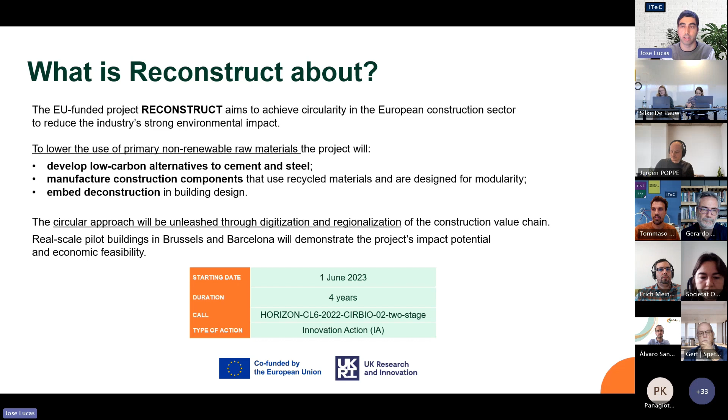One of the main objectives of the project is to try to give solutions to some barriers. There's a list here that I'm sure a lot of you will agree on, but I'm sure there's also missing barriers here. Some of them may be the lack of awareness of how circularity or how these materials with high content of recycled works, high initial cost, fragmented supply chains, lack of standardization for reused materials, for example, or technological challenges to share information between different peers of the stakeholder value chain.

The strategies used in the project are material innovation, design for deconstruction, and digitalization of the different parts of the project. In material innovation, we are replacing ordinary Portland cement with a low carbon solution that my colleagues will explain more about in the focus groups.

In the design for deconstruction, we are integrating the deconstruction processes into the design of the architectural demos itself. We are developing different kits to be dismantleable, ensuring that dismantleability and adaptability are met in these demo cases, and that the demolition sends all the waste to recycling paths or reuses the components.

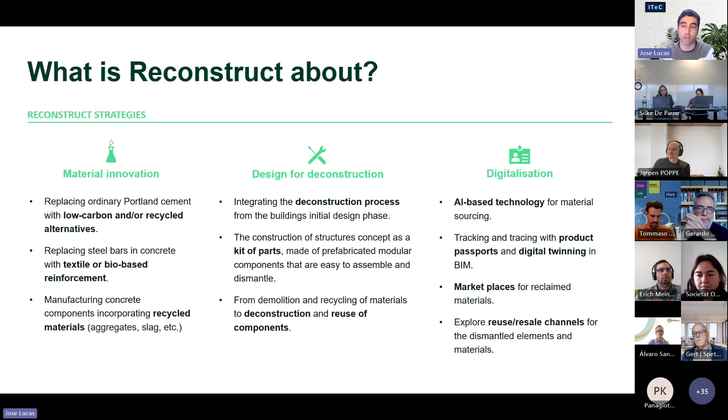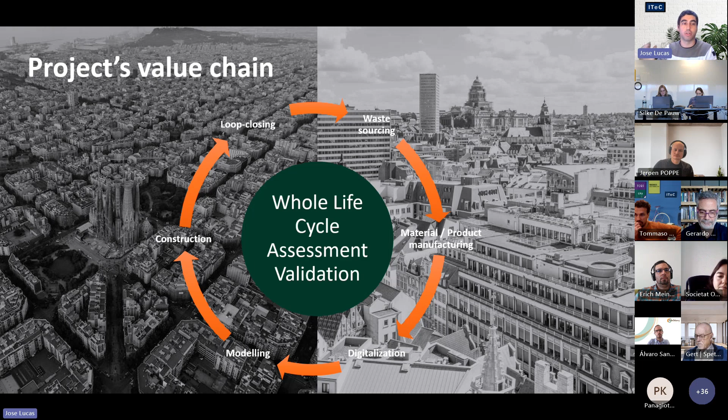As you could see, the project acts in the whole value chain, from the waste sourcing till the loop closing, going through material manufacturing, digitalization, and construction. All of it will be assessed with the different pillars of sustainability, circularity, symbiosis, but also LCA, LCC, and social assessment that will ensure the project is tracked and assessed, so any of these solutions could have a major impact in others that we don't know about.

How are you going to do it? We are 16 partners in the project. Some of them are construction companies, some are manufacturers, but there's also academia, public administration, and technological and software suppliers. So the whole value chain is represented in this consortium.

Hopefully with this connection with you, we will have more agents and more actors in this value chain.

As I said, there's two real scale demos, one in Barcelona and one in Brussels, that I will go through very slightly in the next slides, which will demonstrate these methodologies and technologies in those two different regional situations. Also, for what we are today here, there are two different regional clusters, one in Brussels and one in Barcelona, that will create and co-create different activities and co-validate different results. So all the results expected from the project are validated by the consortium and the different actors of the value chain.

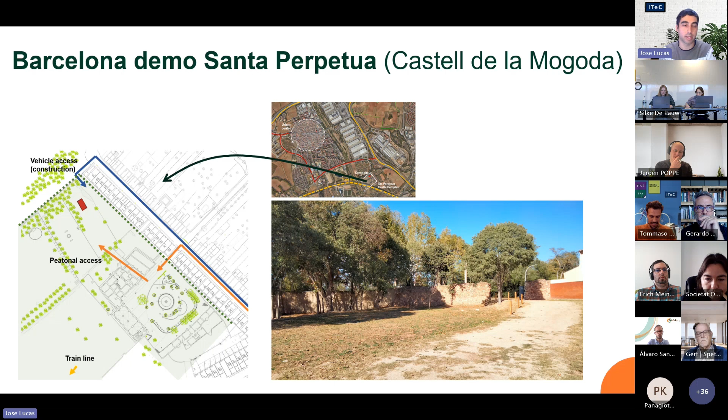Talking about the demos, very slightly: there's a demo case in Barcelona that will be on the land of Incasol, a public organization there. This demo case will be simulating a residential building, but a very small one, 40 square meters, with all the principles I was talking about: dismantling with different materials, with alternatives to concrete and cement, that will be dismantled or repurposed for future demos.

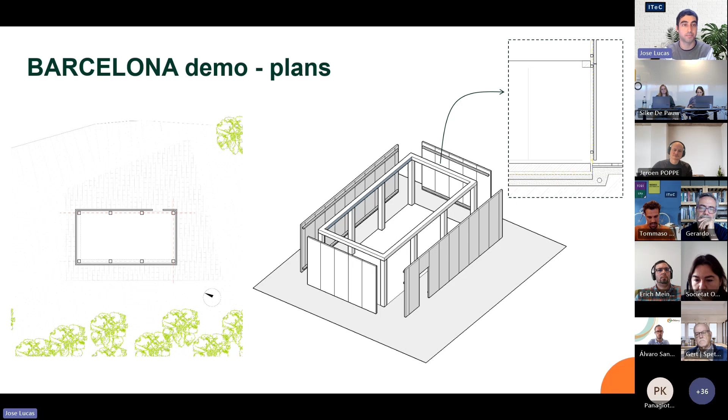And then we have the Brussels demo in Green Energy Park, where the simulation will be an office. In this case, this building will be kept there and used for that purpose. The Barcelona demo site will be dismantled to ensure that the circularity of those products is as expected in the design phase.

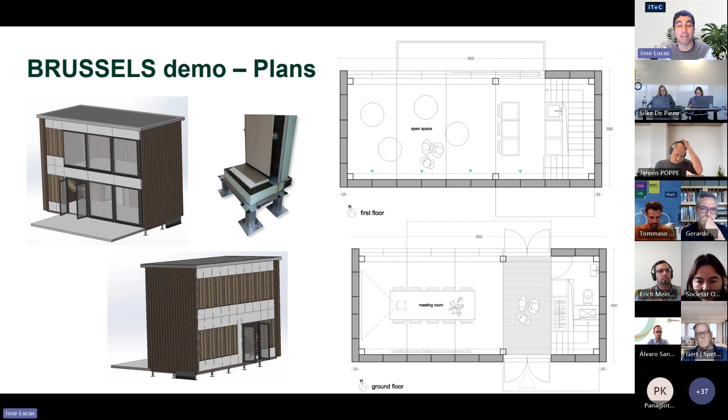Just to finalize, the expected impacts of the project on the construction sector are: reduction of CO2, embodied CO2 of the buildings, reduction of construction waste, lowering as much as we can the non-renewable content, increasing the recycled content—these two objectives go hand in hand—and closing the loop with construction demolition waste, sending as much as possible to recycling and avoiding landfill.

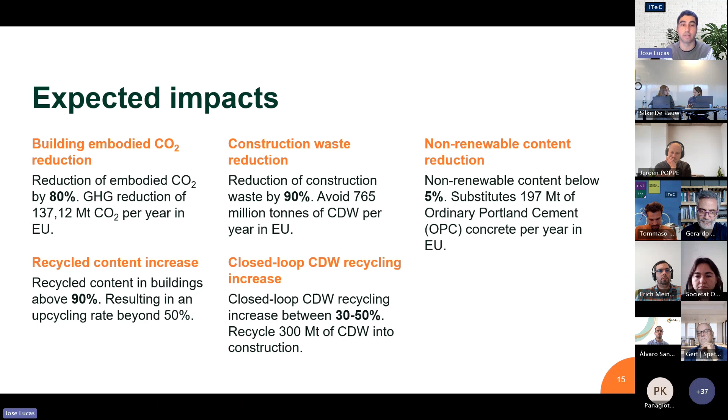On top of that, we will provide a platform where everybody in the hub will be able to talk to each other, and which will also be the platform where we transfer that knowledge to you. We will send you all the information, and we will post some training modules for you to use and have.

That would be a nutshell of the project. I will leave the floor to Eric and Alvaro to talk about the different focus groups, the hub. Thank you.

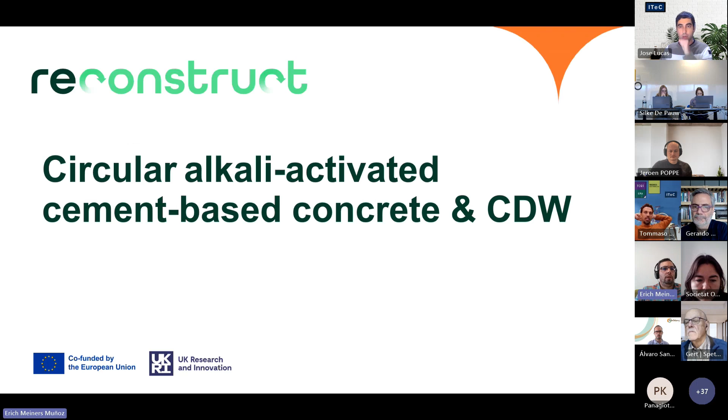We will start with the circular alkali activated concrete. The main objectives of this section of the project consist of reducing the carbon footprint of cement production by developing an alternative to ordinary Portland cement, where alkali activated cement is produced using industry byproducts and wastes. These new materials will be used to build modular prefab and on-site structures, where the amount of concrete needed for production is reduced, lowering the carbon footprint by the end of the life cycle.

Also, as part of this work, a tool will be developed to identify materials for construction and demolition waste using hyperspectral imaging techniques, which my colleague Alvaro will explain in more detail later. Using this information, an artificial intelligence will be trained to quantify the viable materials, facilitating their reuse and recycling once the building reaches the end of its life cycle.

The developments of the low carbon footprint cement and its different applications: the Vrije Universiteit Brussel, the Polytechnic University de la Marche in Italy, and the Technologic Center of Construction, ITeC, in Spain are working on the development of alkali activated cement, which consists of using waste products from industry as precursor materials like fly ash, slag, among others, then adding a combination of special activators to produce this alternative to ordinary Portland cement. This paste can then be mixed with sand and gravel to produce a concrete.

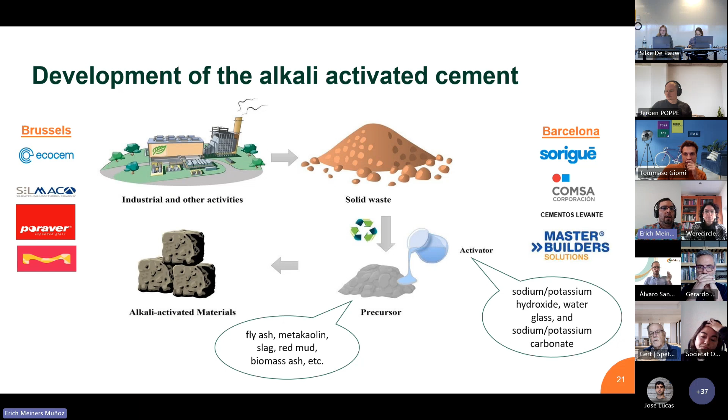This material is going to be used in different applications in the frame of the project. Two regional pilots are being developed, as mentioned before by Jose Carlos, one in Spain and the other in Belgium. The Spanish demo will consist of a one-story building designed for residential use.

The alkali activated cement paste is going to be used to build on-site and off-site production of structural and non-structural elements during construction. The facade elements will be modular and detachable, allowing for easy reuse and substitution, while the remaining elements are going to be recycled at the end of the lifetime.

The focus of the Belgian demo, on the other hand, is going to be constructed for office purposes, using sandwich panels for the facades, the roof, and the floors. The innovative part of this demo is the development of a textile reinforced concrete floor system, and all the structural elements in the Belgian demo are designed to be reused once the life cycle of the construction is finished.

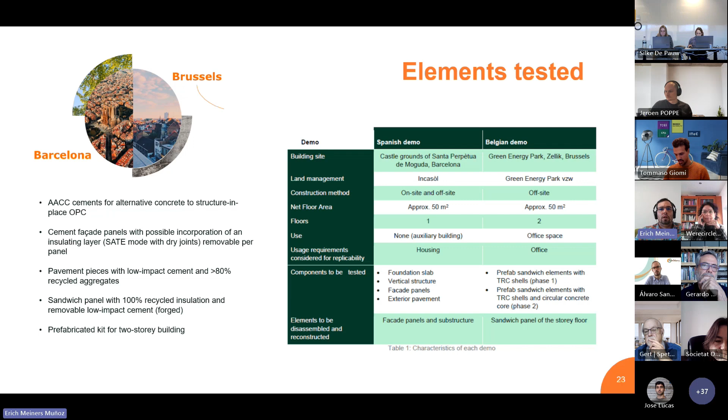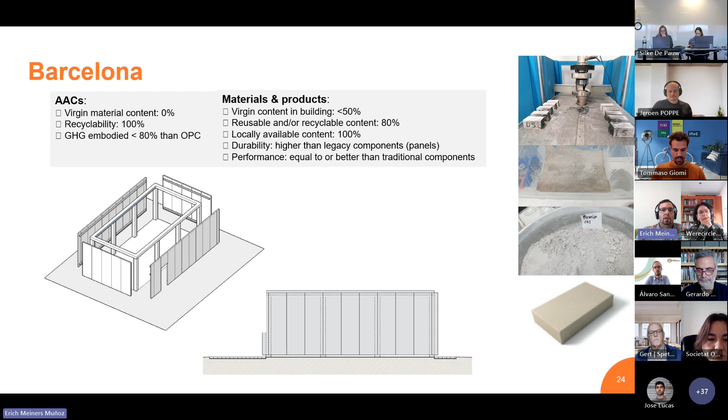Let's go to the next one. The elements produced with these materials are going to be the slab foundation, the main structure, the facade panels, and the exterior pavement blocks.

As I mentioned before, the facade panels are going to be modular and detachable. They are going to be designed with a wind load rating suitable for up to 5-story buildings, so that once detached from the main building, they can be reused in several other constructions around the Brussels or Barcelona region.

The connections designed for these facade panels allow them to be disassembled individually. That means the facade panels are not stacked on top of each other, so they can be removed one at a time.

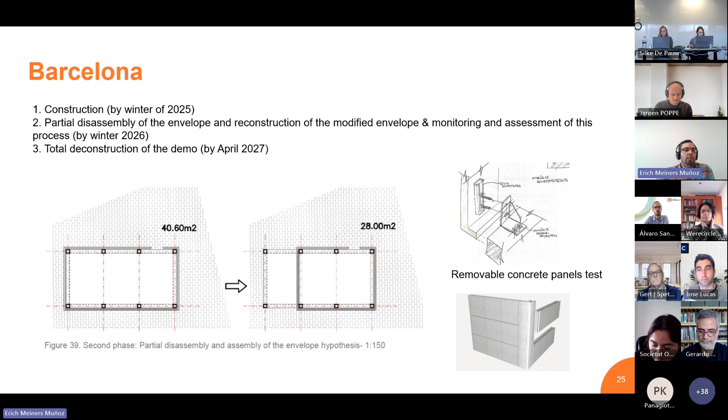To prove this concept, in the first stage, the Spanish demo is going to be built at full size, and one year later, the size will be reduced by taking out two lateral panels, as shown in the picture in the middle, and these panels will be used in another construction in the local area. At the end of the life cycle, the whole construction of the demo will be removed from the site and used for future buildings in the area.

Then for the Belgian demo, which is going to be built in Brussels, the facades and the roof will be made of sandwich panels that have a fiber reinforced polymer with a bio-based matrix on the outside faces, and a central core of PET foam made entirely from recycled PET bottles. This system is based on the cubic system of Holland Composites that has already been proved for buildings of one story high.

But in order to increase its applicability to multi-story heights, a textile reinforced concrete sandwich panel, or TRC, is going to be developed for the intermediate floors. This TRC consists of two very thin concrete faces of 2 centimeters or less, joined together with the central core. In this case, it's going to be PET foam for the first stage. This allows the system to be a super lightweight system of around 120 kilograms per square meter, which is way less than traditional systems.

In a first stage of the demo, the TRC sandwich panels are going to be produced using commercially available materials for the concrete, and the PET foam is going to be the same one as used for the facade panels and the roof. The panels have a span of 3.4 meters and a width of 1.70 meters.

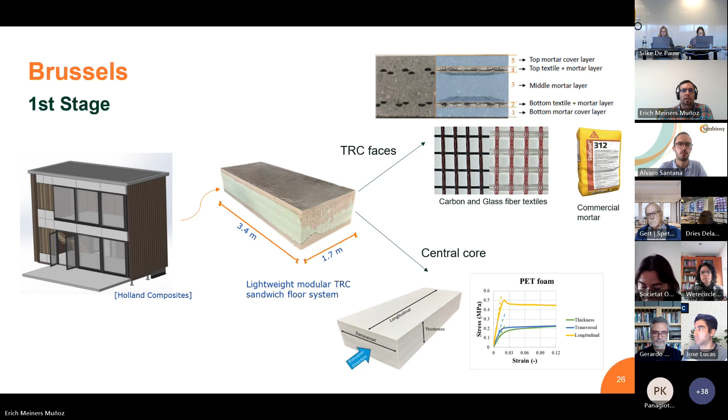But in the second stage, these materials are going to be substituted by alkali activated cement for the TRC faces, and the central core is going to be substituted by a combination of glass beads with the alkali activated cement to produce a kind of foam that is going to be used as a central core.

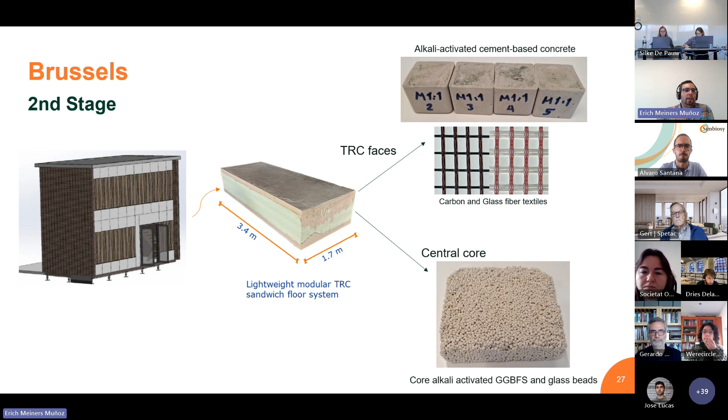One panel is going to be produced using these materials, and it's going to substitute one of the original panels on the Brussels demo to prove the circularity and the modularity of the concept, and also to test in a real scale application the new materials developed in the project. And then I will leave the floor for my partner Alvaro, so that he can talk a little bit more about the quantification of the construction and demolition waste.

Right, so thank you, Erich. So I'm Alvaro from Symbiosy. In parallel to the two pilots that Erich just mentioned, we are also developing other tasks, such as the development of an artificial intelligence model for quantifying the construction and demolition waste just by using images. This is performed by Brunel University in London.

So basically, several camera and drone images have been taken from two sites in Barcelona, one at the company Comsa, where there is a camera installed over the waste area, where we have several fractions such as wood, metals, plastic, cardboard and paper, and glass. And on the other hand, we also have cameras installed at the entrance of a construction waste management plant from Sorigué, where the camera points at the trucks while they are being weighed.

So the model will interpret all these images, and using Grounding DINO and Segment Anything models, they are going to be able to train the artificial intelligence so that it can detect which kind of waste is present in that image. And through a regression learning approach and other methods, together with the log files from these two sites, we'll be able to assess the amount of each construction and demolition waste that is on each image.

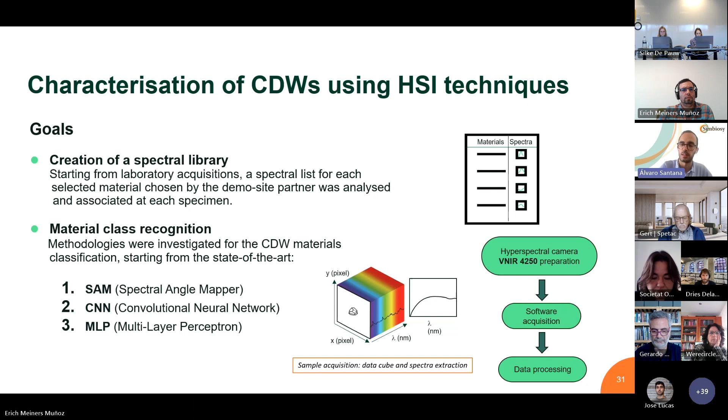And lastly, at Symbiosy, we are trying to figure out the valorization routes for these construction and demolition wastes, and also find out local sources for input materials for the concretes that are being developed in this project.

At the same time, with all the ingredients or elements that will compose these alkali activated cements that Erich mentioned, such as fly ash, biomass ash, or recycled aggregates, we will try also to find out local providers for these materials. On the other hand, at COMSA site, we have segregated waste that is going to be analyzed, and its suitability for recyclability will be determined, so that we can then make a matchmaking with the waste treatment plants that are also in the area.

So in the end, with all this information, we will also add some criteria for ranking the optimal routes for valorization, and we'll take into account things such as the price, the demand, or the logistics and distances for transporting these materials, and then we will get a decision support tool that will guide us through all the options that we have on the table.

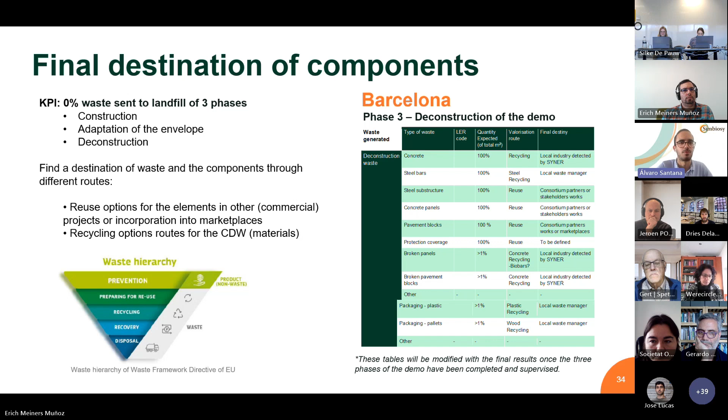So that's it from my side. Thank you very much. And now you have a Mentimeter to start ranking some of the proposals that we have discussed.

Yeah, so we prepared for you on this topic 8 questions that we ask ourselves, and that are based on the state of the art that we have explored in the past few months. We would ask you to log into the Mentimeter again, and what we are interested in is to see how you would rank these learning questions. Which ones are the most important for your practice, and which ones are less.

Yasmin, maybe in a few minutes you can show what the results are giving us. Take your time to read them through. They're a bit long. But as a first step to get your inputs in this project, this would be a small exercise to get a feel of what resonates most with you in your day-to-day work.

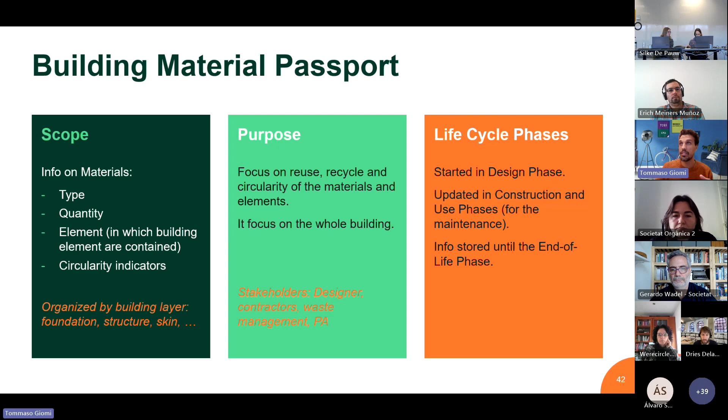So to do that, we are going to create a digital environment that will start with the digital product passport from the materials that are composing the elements of the building. The material product passport could be included in the digital product passport of the element, and every piece of them will enrich the BIM model that will be used as a baseline in order to create the material passport, but also the other assessments that will give us information about the building, that Laura is going to explain right now. Thanks, Tommaso.

So we are going to continue with the assessment. As my previous colleague has advanced in the previous slide, we are going to do 5 assessments. And we are going to consider the 3 aspects of sustainability: the economical part that is implemented by the LCC, then the social aspect with the S-LCA, and the environmental aspect that is assessed by the LCA, but also by the circularity and symbiosis potential, as there is not an exact methodology to assess circularity. We are going to talk inside the hub about this concept, how the methodology would be, how the results or outputs could indicate the circularity of our buildings and also at product level.

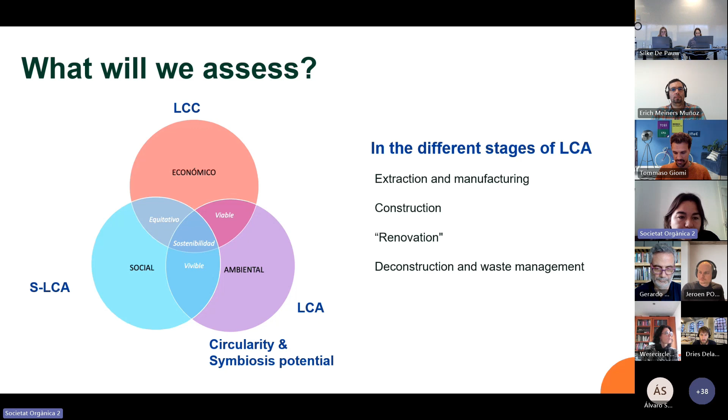So how you are going to be included in this process. In all assessment processes, we have to take some inputs, then calculate through different methodologies, and have some outputs or outcome indicators for this assessment. So, for example, inside the hub, we will talk with you about validating the inputs that we are taking into account for the assessment, or maybe ask you for some inputs that we are maybe not taking into account in the Brussels context. Also, the data origin of these inputs, we'll talk about it.

And these are examples, because during the project we'll go through more, and for sure you are going to ask us to take into account other debates inside the focus groups. We'll also talk about how to get inputs efficiently from the developed digital system that Tommaso was explaining, depending on the life cycle stage, because we all know that depending on the life cycle stage it will be more easy or difficult to get some inputs to do the assessment. Then in the part of outputs, we'll talk with you about whether the results or outcomes that we are considering are relevant and useful to you, to the different stakeholders in the construction sector.

Also, as I was advancing before, we are going to define this concept of circularity at different levels, component level and building level. What we mean by that, what are the methodologies to assess this, which are the outputs we want to consider here to say that it's circular. I will explain more, but we are going to weight a lot of different indicators to have a unique indicator to say whether this is circular or not.

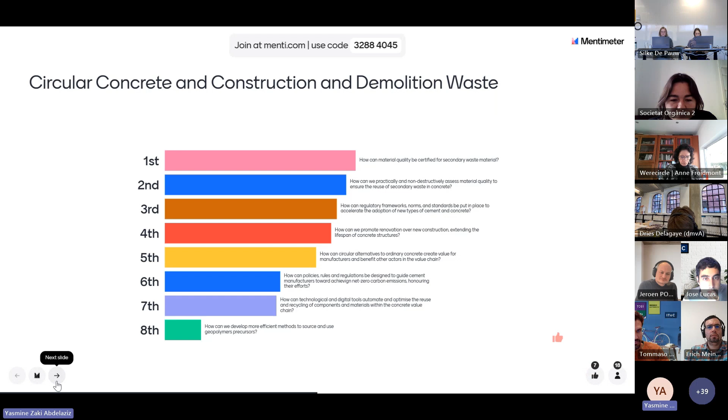I think I can show you that the least preferred question and the most preferred questions remain the same as in the first round. So there are strong opinions about it. And now let's see if something is coming.

So Tommaso, if you want to start commenting more or less? I was trying to answer on the Mentimeter, but my page refreshed and I've lost all my classification, so I'll just read the other ones. Now you can say if you agree with the answers.